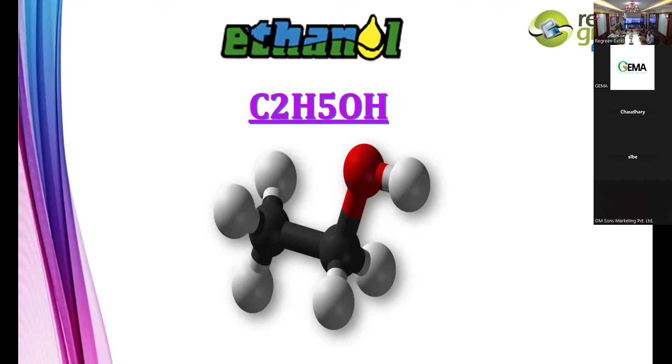Ethanol is a molecule because of which we are here today. It has inspired a lot of people like technocrats, industry stalwarts, including the farmers and their children, because ethanol has become a revenue stream for rural India in the last 4 to 5 years. More than 50,000 crore revenue has percolated to the farmers every year.

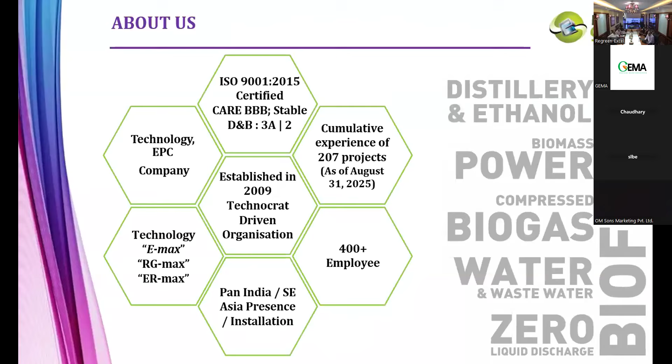I think most of you know about our company, so I won't be explaining each slide. I will just glance through these slides. Basically, we started our journey in terms of technology development with Emax. Every year we have come out with a newer version of Emax, Excel Maximize technology. So now we have from Emax to Emax 99. By understanding the problems of the industry, talking to all the technical people like you, operators, and buyers, we always identify certain problems at every point of time. Then we try to give a technological solution from time to time. That's how these technology versions have been in place.

We have done more than 200 plants. Out of 200 plants, 132 plants are grain distilleries. We have a very professionally managed independent board of directors. Mr. Narendra Mohanji has joined our board of directors, and Mr. Jayan Goodwale is a stalwart in international business. He's been with us as an additional director, and some financial experts have also joined our board. We started our journey as a technocrat company. These are our various partners and directors who are all technical people, and every day we work as engineers and manage the projects and the business.

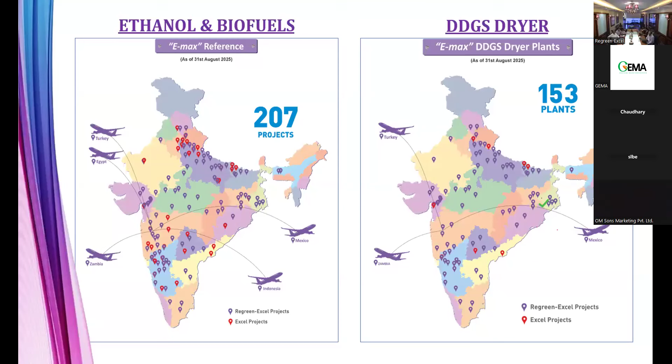Then we have also developed our own capability to do the dryers. We are now fabricating our 153rd dryer as of now. We have already commissioned more than 100 dryers. So we are also doing our own CBG plant, and we also developed in-house capability to do the engineering and project management of biomass power for various of our projects.

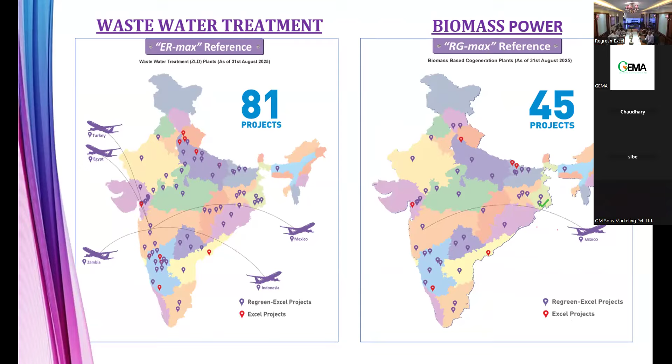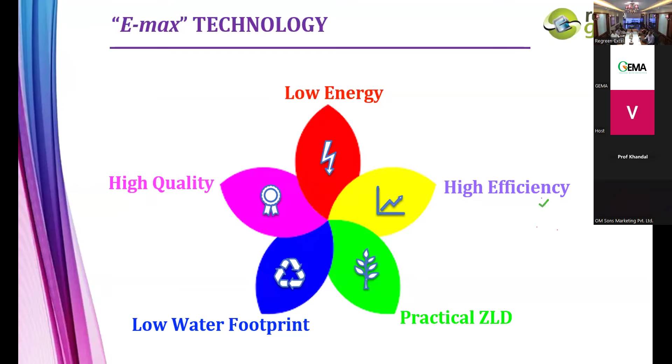So that's where we try to also develop our own biomass power plant, our own water and wastewater management plant, and also we work on the electricity requirement. So it is not just that now you produce 91%, 92% fermentation efficiency, then the investor will make money. So we have to see each and every section. So that's why we call it Emax comprehensive technology, to take care of each parameter in the operating cost cycle.

So I already explained we have developed right from Emax to Emax 99. For the grain ethanol industry, now we are able to bring down the steam to 2.5 kg per liter. Similarly, water also is getting reduced. Then yields are quite high. Then for molasses, we can go as low as 1.5 kg steam per liter. So with this, for a greenfield plant, we can save over 2 to 3 rupees per liter on operating cost. So in today's context, this is a huge improvement in the profitability.

So continuously we are working on these parameters. So probably we'll further reduce all these inputs next year with our new technology. So these are some of the plants we have set up. We have set up an 800 KL sugarcane juice plant, which operates at 600 KL on grain. We have recently taken a project for a 600 KL single grain ethanol plant. And these are some of the equipment we have done in the recent past.

So as you can see, slowly and steadily, this industry is moving to economies of scale of operation. How much more ethanol you will produce in a single campus decides the total cost of ethanol and also operating profitability for the investor. So that is the reason more and more companies are trying to expand in the same campus. So we are able to cater to those needs by technology innovations.

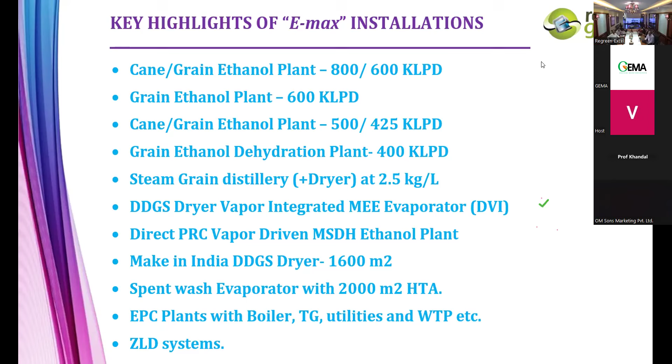So basically, there are a few feedstocks. I'm sure everyone is aware. One is the sugar-containing feedstock. Second is the starch-containing feedstock. Third is, of course, cellulose. Then you have 2G and 3G in cellulosic material.

So basically, in India, we are familiar with sugarcane and broken rice and corn as the main feedstock for the industry. Apart from this, we can also look at sweet sorghum. Sweet sorghum is a really good solution for our feedstock because today one can convert grains into ethanol and also you can convert the sweet sorghum juice into ethanol, and you get bagasse which can be used as a fuel. So this is going to be a future feedstock. Many of the companies are now doing a lot of field trials on a pan-India basis.

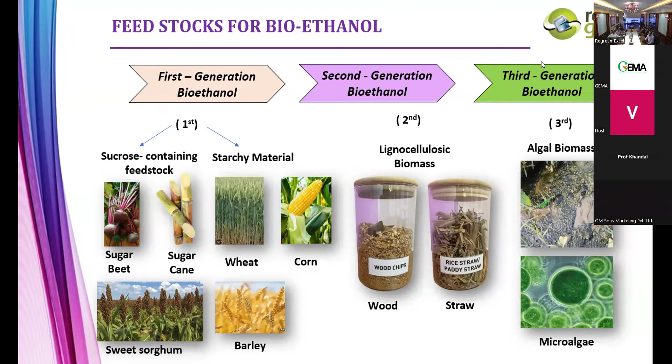So I would say the 3G, which is from a softer cellulosic material like algal biomass, which is more soft cellulose, may be tried out in India. Being a tropical country, we have a lot of sunlight. One can definitely grow algae in masses. And CO2 from the 1G plant can also be used for growing the algae. That is another advantage we have. So I hope sweet sorghum and algal mass will be the future feedstocks to consider for R&D and technology development.

Today, if you see in Brazil, they are successfully doing E27 plus or minus 3. That means when they have excess ethanol, they do 30% blending. When they don't have much ethanol, they restrict themselves to 24. This is already proven. All the automobiles, various models, have been using these kinds of very high ethanol blends.

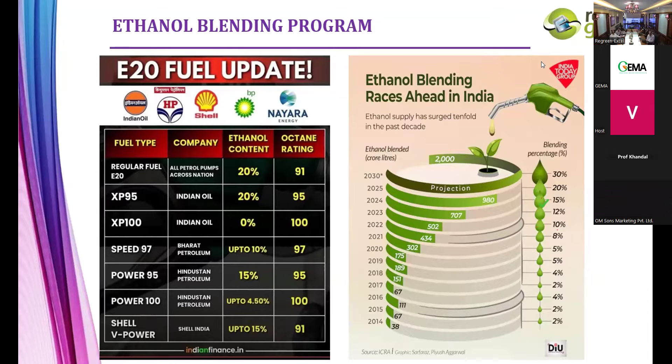So nowadays, because of government policies, the government wants to provide 40% rice from the FCI, the remaining DFG or maize for the industry, and also there are a lot of companies who have molasses or sugarcane. So multi-feedstock is becoming a norm in many places like Karnataka, UP, and Maharashtra, where you have sugarcane and also grain. At the same time, many companies are also looking at producing ENA in the same plant, apart from ethanol.

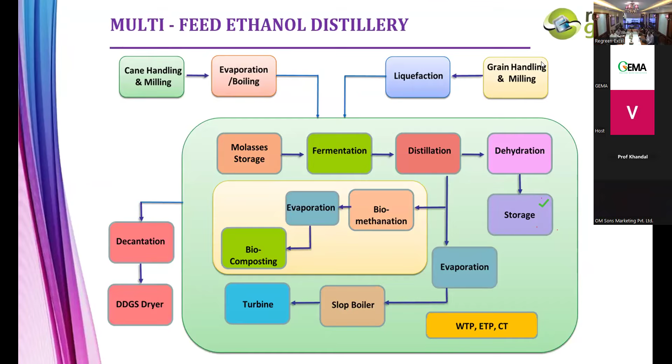So basically, now everyone knows about the 1G technology. You have dry milling, then liquefaction, fermentation, distillation, and ethanol dehydration. Then you have decantation followed by evaporator and dryer. This is the standard technology that has been implemented, and most of you have dryer integration where the dryer energy is used for running the evaporator. So this is the configuration we have.

But in order to exploit the better value of the feedstock, one can think of various technologies or add-on technologies to improve the profitability.

One is, of course, the differential milling technology, called selective milling, where one can access more starch to produce more ethanol. At the same time, you can separate the fiber, and that fiber can be added back into the DDGS to get a better value for DDGS. So this is one technology.

Second is 1.5G technology. Some of the fiber that is separated can be converted to ethanol. So apart from starch to ethanol, you get a higher yield through this fiber conversion.

Then corn oil separation - I think many of you have already implemented this system. One can separate corn oil at different places in the distillery, and each scheme has its own feasibility in terms of how much oil you will get and what is the cost.

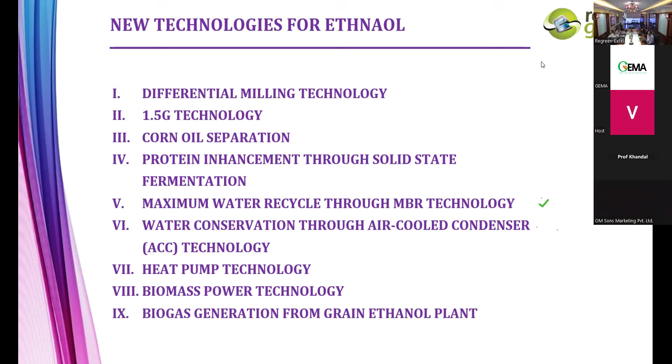So I'll go into a little bit of detailing. These are some pictures from American plants.

Differential milling - basically once you have the slurry, you use a paddle screen, shown at the bottom. These are high rotating paddles inside, and at the end there is a screen. It works like a centrifugal machine, a decanter, but with paddles inside instead of a scroll. One can always separate fiber from the starch, and the starch can go to the grind mill for further grinding, then liquefaction can continue. With this, we'll have separated the fiber effectively.

Then more and more starch particles are subjected to the action of enzymes in liquefaction, so your liquefaction enzyme efficiency will be higher. Some part of the fiber also comes into liquefaction, and that will also get converted into ethanol using different enzymes. This technology is already implemented in the USA.

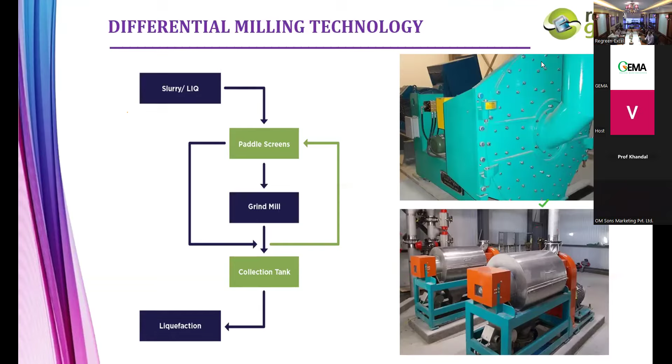So this can be thought in the Indian context also. Once you have fiber separation from the earlier method, one can also look at recycling back the fiber, subjecting it to fiber-to-ethanol conversion technology. Here you need a little bit of 2G enzymes, and you also need high temperature and pressure. That's why on the right-hand side you'll see a picture, which is basically an autoclave reactor - something very similar to a bigger 2G reactor, but smaller with low capex, low opex. Our aim is only to separate fiber.

With these two technologies combined, one can look at increasing ethanol yield by 8 to 10%. Supposing you are getting 380 liters, one can think of getting almost 415 to 420 liters. Corn oil recovery will also improve because you are separating the germ very effectively in the differential milling machine. Dryer energy will naturally reduce because you are not putting so much fiber through it, as some of the fiber is converted to ethanol.

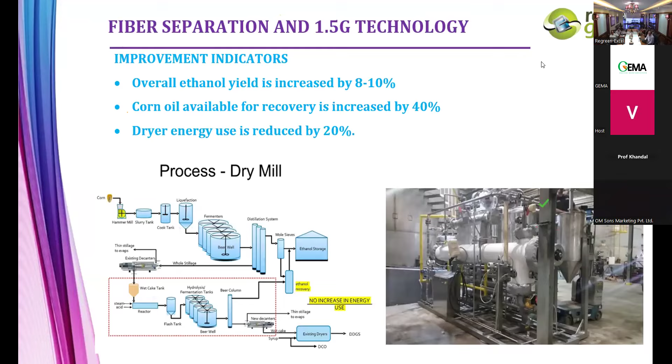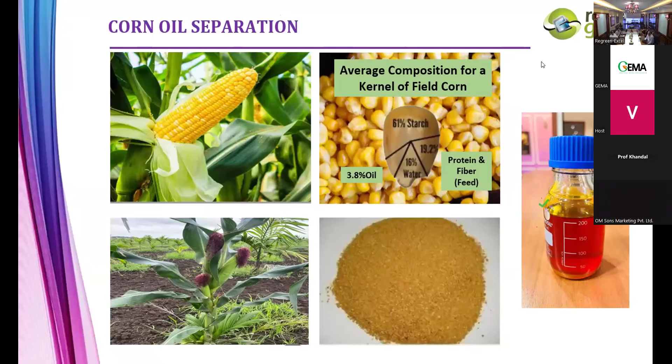So of course, corn oil separation is another byproduct which one can look at. So these are the corn oil samples. Of course, today ethically corn oil has to go for biodiesel because we are separating the corn oil from either a tricanter or a decanter separator after the process. Only when you separate the corn oil before the liquefaction by using a dry milling germ separator, then only it can go for edible purpose. Otherwise, once this is processed through liquefaction, fermentation, distillation, then ethically it should not be blended with the edible oil.

So chemical composition wise, it will have more impurities. So therefore, since we are having a technology to separate the corn oil after the distillation, we always recommend that they should be sent to the biodiesel industry as a feed.

So today there are two methods. One is after distillation analyzer column. Before the decanter, one can have a decanter separator to separate the corn oil. So you need some demulsifier for this. So with this, the corn oil separation quantity wise will be higher. We can get almost 6 kl for a 100 kl plant in this system. Then decanter onwards, the process remains the same.

Then depending on the DDGS requirement in terms of the oil and fat, one can always decide how much corn oil to separate and how much to leave in the further process so that DDGS will have the required oil and fat composition.

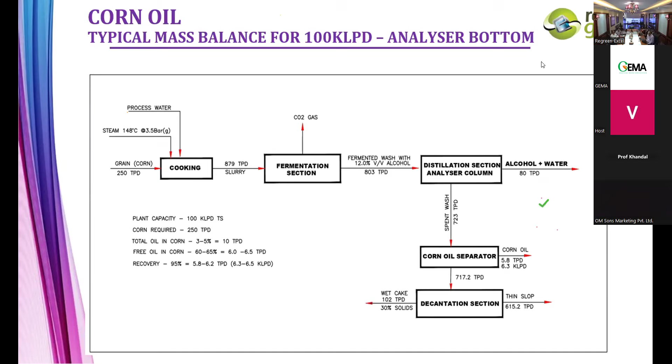The second method is, after the evaporation, before the syrup goes to the dryer, one can put the same decanter separator machine. So there you can separate the corn oil also. But here the quantity of the corn oil will be less. It will be roughly half of what it would have been when we do the first process. Because whatever oil is coming in the thin slop, only that is coming into the evaporator. Whatever corn oil is going in the wet cake, that remains the same. So this is another method.

So we have developed a single machine which can be used for either of these applications along with Alfa Laval. The only thing is, when you use the same machine at the evaporator syrup line instead of the analyzer column bottom, the capacity will be half. So this is the only point you have to consider.

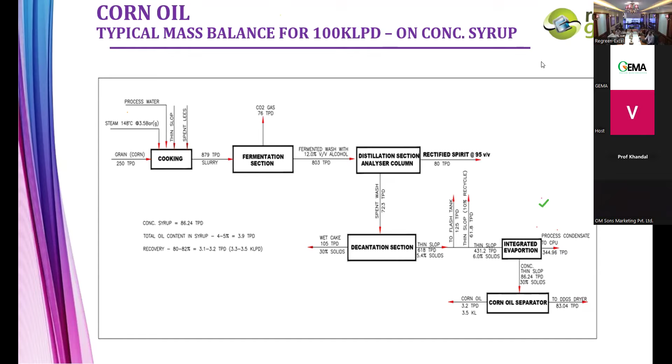And the oil recovery will be also half. So protein enhancement can be done. Basically it is a very simple process. Once you have wet cake and syrup from the high mixer, you take it to a diffuser trough where aeration is being done and the whole wet mass moves from one side to another side. We need about 6 to 8 hours retention time.

Then you add some special yeast strain with some nutrients. So the yeast and bacterial strain will grow on the wet cake and the syrup. Then at the end of the 6 to 8 hours, it will go to the dormant state, where it releases a lot of protein from the cell walls. So that's how you can increase the protein content by 10 to 15%.

This is tried in many countries abroad. So we are also developing this technology and equipment so that the protein content of DDGS produced from corn will be higher, texture will improve. We also hope aflatoxin levels will come down because some of the fungal affected mass in the DDGS will be consumed by the inoculum. So that will make it a good DDGS at the end of the cycle.

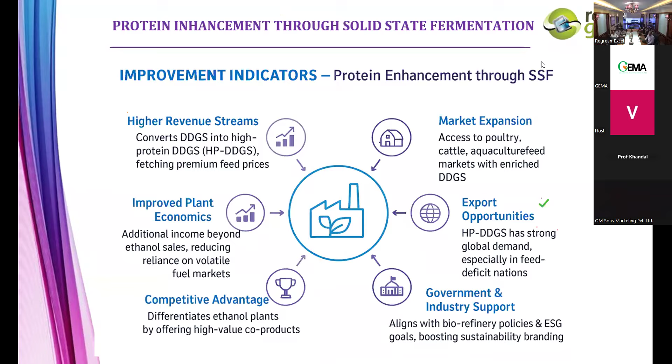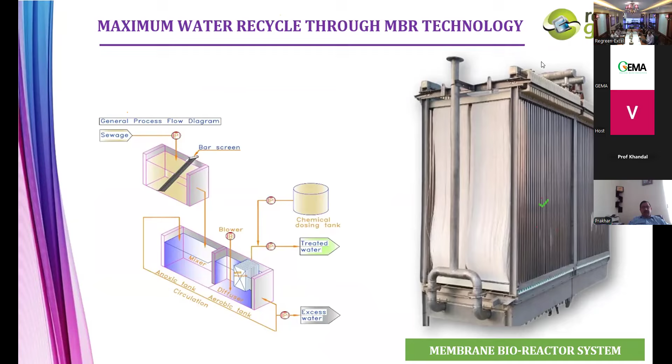So after the anaerobic digester for CPU, one can do a little bit of variation. We can pass the treated anaerobic water through this membrane. This will produce very good quality output water, which can be recycled to fermentation. That's how we can look at almost 95 to 97% recovery, and your reject will be much less.

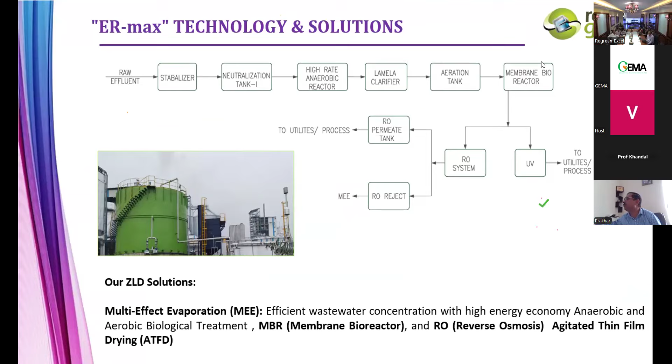So this is a typical scheme of that. And of course, today the challenge is to use this water from CPU for fermentation. With proper operation of this system, one can always look at using maximum water into fermentation. Then to reduce the reject or to take care of the reject, one can also use ATFD, agitated thin film dryers, to make it into a salt instead of liquid discharge.

Then, of course, air-cooled condenser, most of you are already aware. If air-cooled condensers are used properly at various places, especially the evaporator, then one can reap the benefit of air-cooled condensers with low power consumption and also less water requirement. If you try to be very aggressive and use it everywhere, just for the sake of using it on every alcohol vapor, then the power consumption will go up and you will not achieve as much water saving compared to the power consumption and cost of the air-cooled system.

So we always recommend that air-cooled condensers should be used only for the evaporator, not for the alcohol vapors. Also, the risk of losing alcohol is not there when you use it for the evaporator.

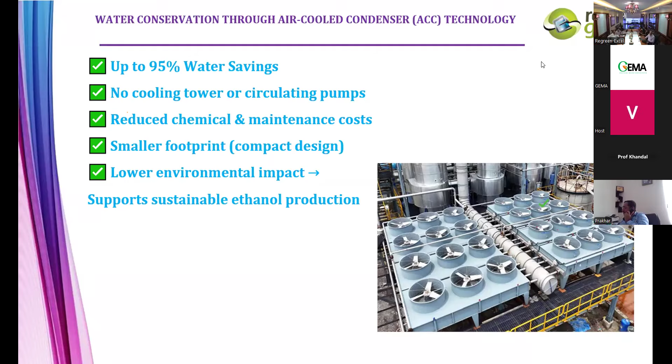Then that can be used as steam once the plant is stabilized, in a few hours. This will help make the steam consumption zero for your evaporator. Also, for running the distillation, one can use these heat pumps. So only here again, the challenge is if you use these pumps not efficiently, if you go very aggressive, then the power consumption will go up.

So one has to be very careful about where to incorporate these heat pumps, because that will decide both the capex and opex. In our system, for a greenfield plant, when we bring down the steam consumption from 4 to 2.4 kg, we don't take any extra power. In the same power, we can connect the heat pumps and still reduce the steam consumption. That is our specialty of the technology we have developed.

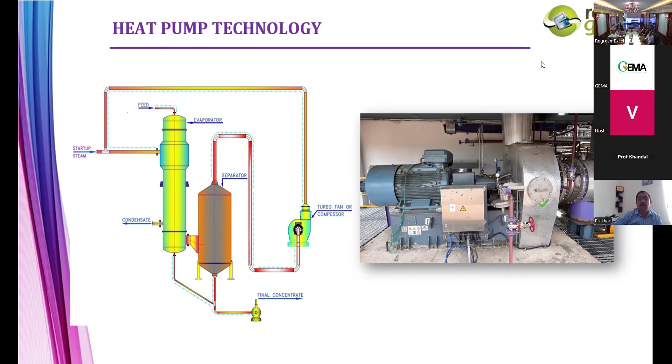At the same time, for a greenfield plant, the capex will not go up. Whatever saving we achieve in the boiler capacity, also in the cooling tower capacity, within the same capex, one can add 3 to 4 heat pumps. That is how we have integrated the system. We are already doing more than 25 projects based on this technology, as big as 600 KL.

So this is a typical scheme. Basically, in the evaporator, it is very simple. All the standalone evaporators can be run on heat pumps. Only for startup do we need steam.

But apart from this, in the dryer, we have a lot of extra energy. When you connect the dryer vapor directly to the evaporator, we will not be able to recover 100% of the energy because the dew point of the vapor -- there is almost 30 to 40% air in the dryer vapor. That will not allow you to recover all the heat. The dew point of 85 degrees decides how much condensation will happen in the evaporator.

Whereas when we connect a heat pump, this increases the temperature of the vapor, so your dew point also gets shifted. So you can hope to get more and more energy recovery. We can even use it for running the distillation columns or even heating the liquefaction, with this facility. That's how the steam consumption will be reduced using this.

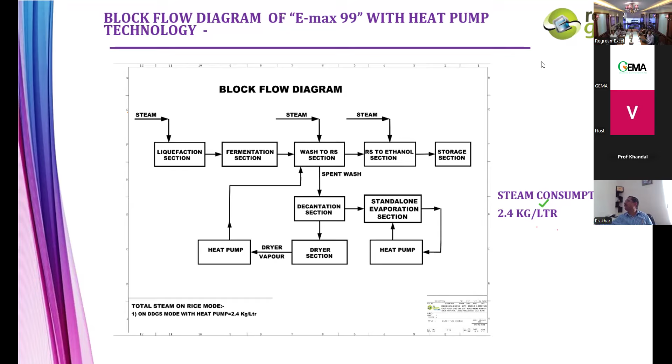Like I said, when we integrate the heat pumps, we don't increase the power consumption, and at the same time we don't increase the capex. So for a greenfield plant, and for a brownfield existing plant, we can always look at expanding. If I save say 10 ton of steam from the existing plant, the same 10 ton of steam can be used for increasing the capacity of the plant. So that way, the heat pump will be more effective for an existing plant.

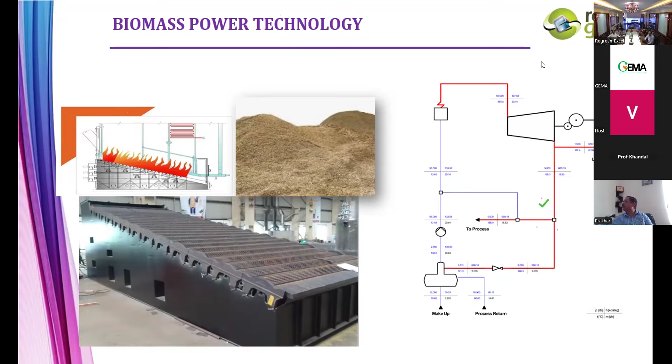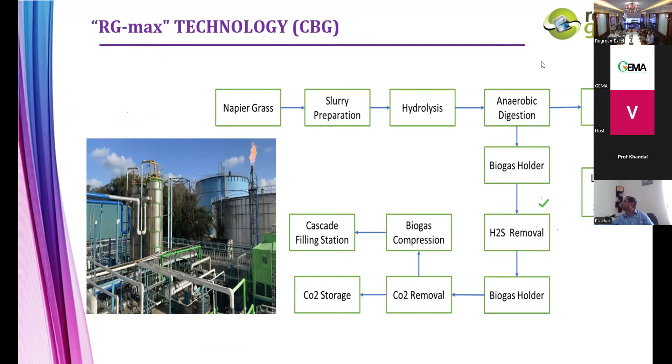These are some of the data. And apart from this, in Excel, we have developed the CBG technology mainly for Napier grass, where it is more cost effective, and also in terms of operating costs it is much lower than the present technology. So with this experience, one can also think of developing a core CBG production with ethanol production, including the conversion of the syrup to CBG.

Because everyone knows that the biggest enemy for DDGS quality is the syrup. Because it has got less protein, it spoils the DDGS quality in terms of the texture of the DDGS. The color of the DDGS gets affected because of the syrup. So one can separate out the syrup to a large extent and convert that into valuable CBG. That CBG or biogas can be used in the existing boiler, or you can also develop a CBG business for that. So technically, the DDGS quality will improve. One should get a better price for DDGS.

So in future we have to evaluate the feasibility, because right now the DDGS quantity is quite high all over India. So even if I remove the syrup, the DDGS price remains the same, but technically it should go up. In the past it used to go up. So after probably 1 year, once the DDGS market stabilizes, one can think of doing this CBG in the same plant. Of course, if somebody wants to expand without adding a dryer or a new boiler turbine, 30-40% expansion can be thought of by just adding a few fermenters and a CBG plant.

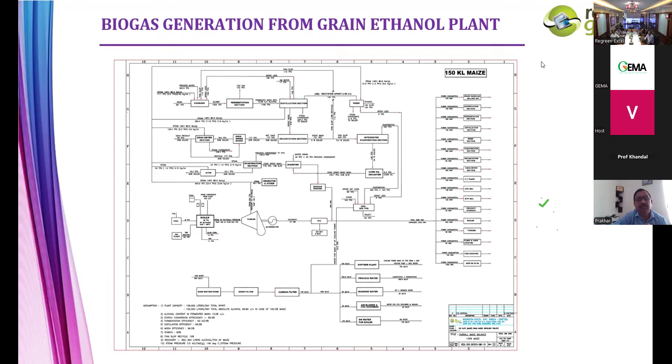Because the same dryer, when you remove syrup, can give you higher capacity. So with some 20%, 25% capex, you can get a 30 to 40% increase in capacity with this method. And your fuel costs remain the same because all the gas can go to the boiler. So this is one scheme we are working on. We are working with quite a few customers to establish the commercial feasibility first. And then we hope next month onwards we'll start implementing a few projects on this. So these are some of the plants set up by us.